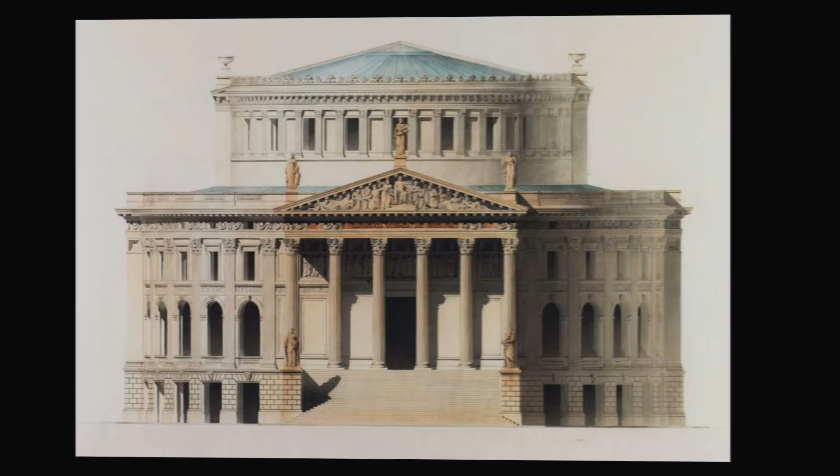Every practicing architect knows that solving facades is a very difficult task, no matter how much experience one has. Therefore, students are more than justified in their anxiety about the subject. What follows is a series of reflections on some choices that can and must be made when we have to decide what a facade will be like.

It would be impossible to mention all the themes and their alternatives. Therefore, I will limit myself to mentioning and commenting on some topics that seem relevant to me and that deserve to be explored in other moments.

It is also worth remembering that the facade is a three-dimensional element with thickness, and it should not be confused with its two-dimensional counterpart, the elevation.

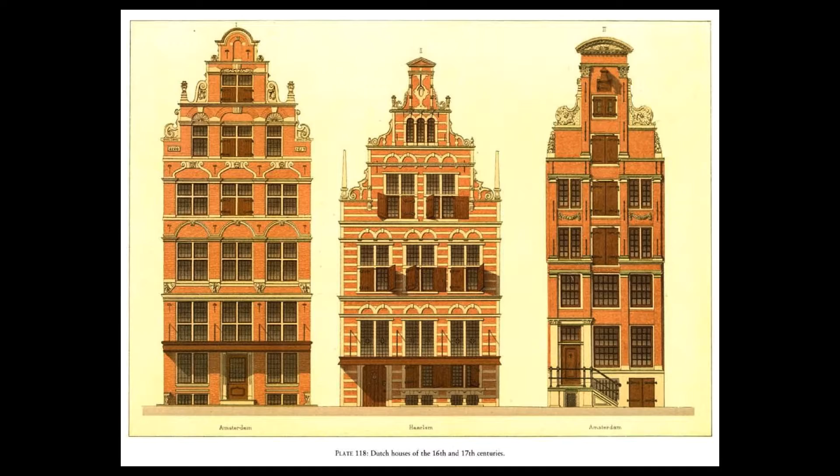Since the very first buildings were built, there must have been a concern with the appearance of the building's vertical boundaries. But it is from the Renaissance that the facade becomes an important element of any project. Remember that at that time, any important building was a typologically predetermined masonry box, covered with historical elements of Greco-Roman origin.

Which aimed to endow the building with unity and proportional relationships. This superficial layer was extremely important, as it was the means of establishing connections with the past and with what was considered to be the structure of the world. The microcosm reflected the macrocosm.

At the outset of the Renaissance, we see the beginning of a more careful treatment of the facade, by the hand of an architect who had worked with Alberti in Florence, Bernardo Rossellino.

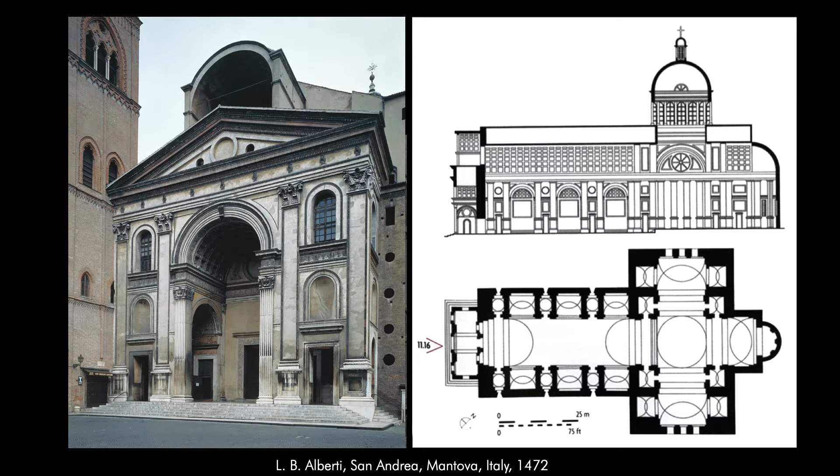In San Andrea, Alberti combines a temple front with the triumphal arch motif to solve the facade of a church organized as a longitudinal nave and side chapels.

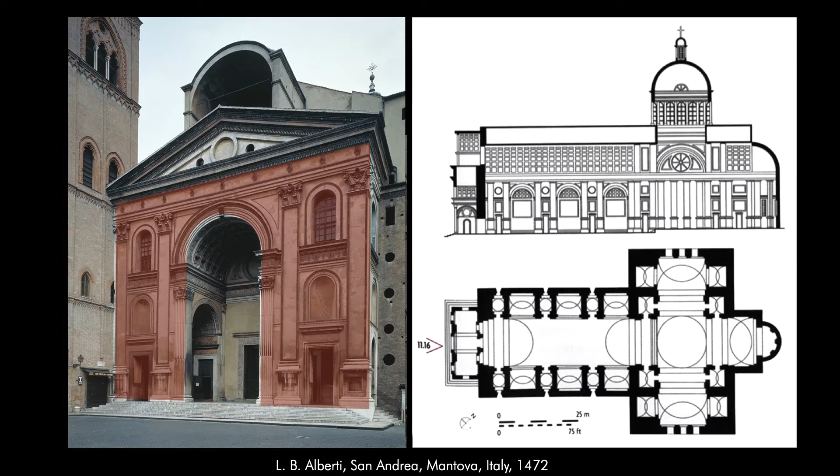In San Giorgio Maggiore, Venice, Palladio superimposes two temple fronts to create the facade of a plan that consists of three parallel naves. In order to accomplish that, he had to adapt the language inherited from Rome.

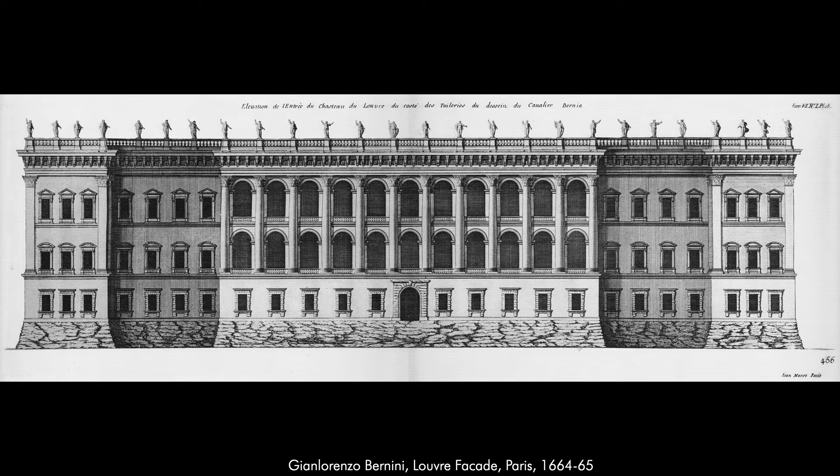So important was the appearance of buildings that, in the middle of the 17th century, a kind of contest was held to solve the facades of the Louvre in Paris, with Bernini being one of the invited Italian architects. Unfortunately, none of the projects were built.

In England, in the following centuries, the concern with the quality of the facades passed from the isolated building to the blocks that materialized the many urban projects that characterized Georgian London.

In some cases, the solution was to distribute the same elements over very extensive facades. But soon, architects started to introduce rhythms and centralities in facades the size of an entire block.

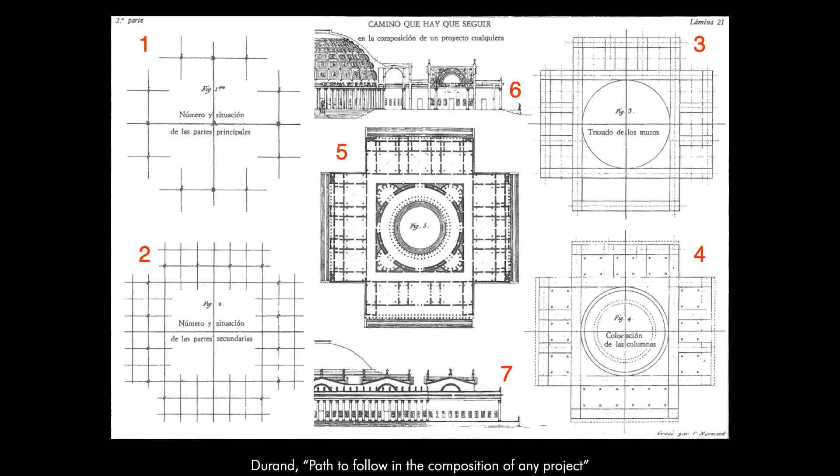Here we see this drawing in which he explains his method of design. And the numbers indicate the place given to the facade, which is number 7, that is the last step in a sequence.

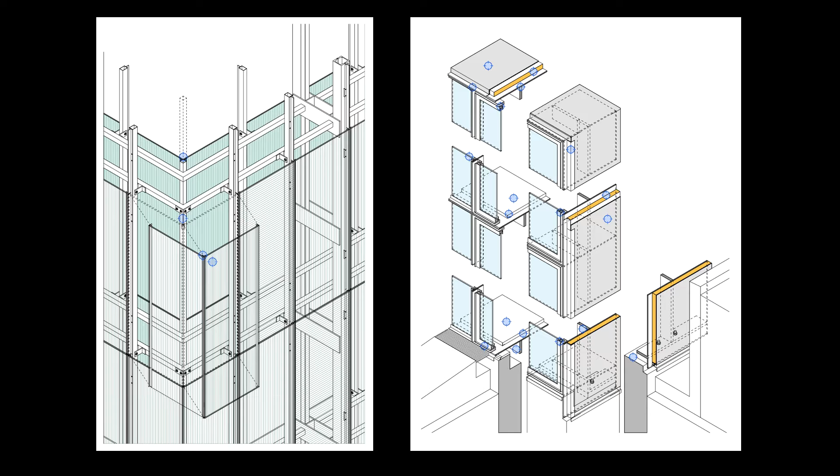At least conceptually, using a curtain wall seems to be an easy option, as it is a repetitive and homogeneous global solution. But whoever decides so soon realizes that this type of facade implies a series of other themes and problems that need to be solved.

There are situations in which, for reasons of privacy, orientation, or climate, one has to revert to the stage when there is much more wall than openings.

One could think that the opaque versus open theme is limited to the traditional facade, but it pertains also to Le Corbusier's free facade and the ribbon window. And if we add the thickness of the facade to the theme, the equation becomes a little more complex.

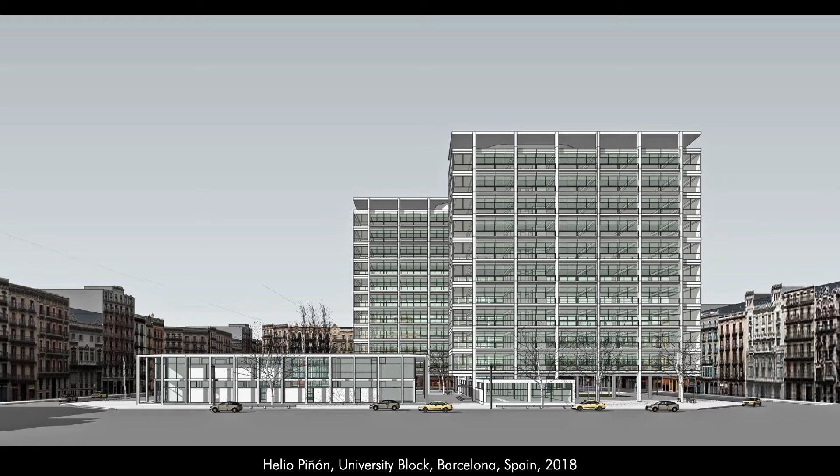The possibility of total glazing also depends on the use of the building. Offices lend themselves to this more easily than residential buildings.

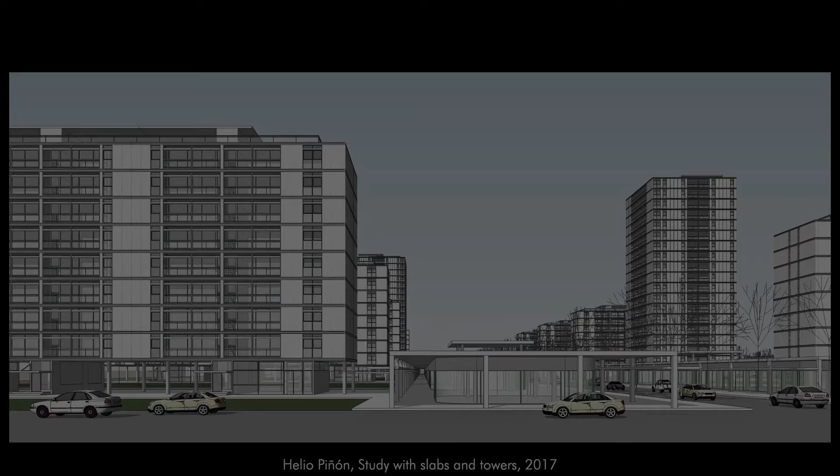The repetition of the same element over long stretches of facade can generate monotony, as we saw in the Park Crescent example, and as Arne Jacobsen himself tacitly recognized by not completely repeating the facade system used in Rodovre. At St. Catherine's College, he introduced a second rhythm that made a facade of more than 100 meters not monotonous, and he did so by making the party walls apparent, which also served to make very evident the 3.2-meter module that controls the whole project inside and outside.

The way in which the facade relates to the resistance structure is another very important theme that results in numerous design situations. The three clearest situations are total independence between the two systems and the subordination of one of them to the other.

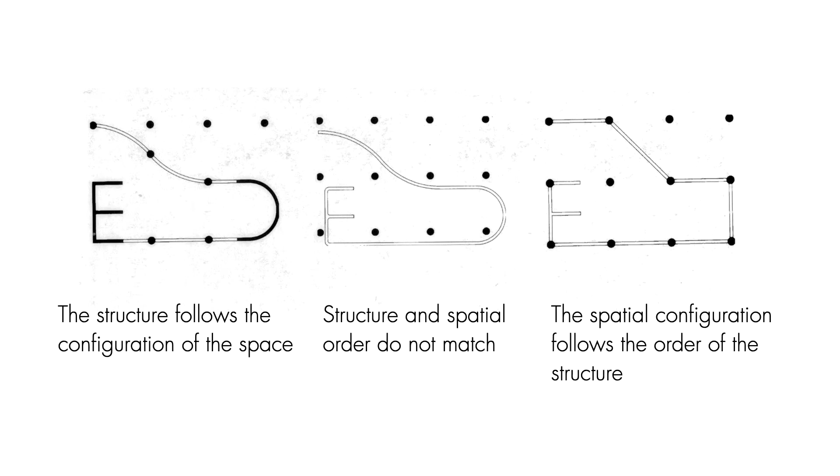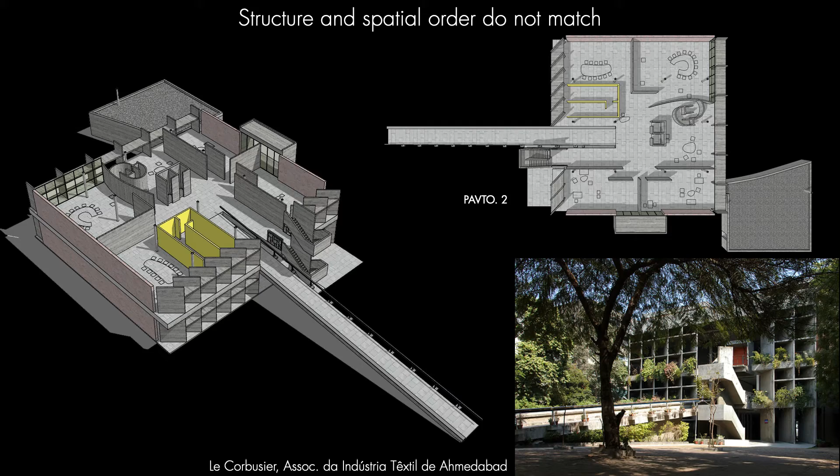In this example, by Wright, the structure follows the configuration of the space. In this one by Le Corbusier, structure and spatial order are independent from each other. And in the one by Kahn, the spatial configuration follows closely the order of the structure.

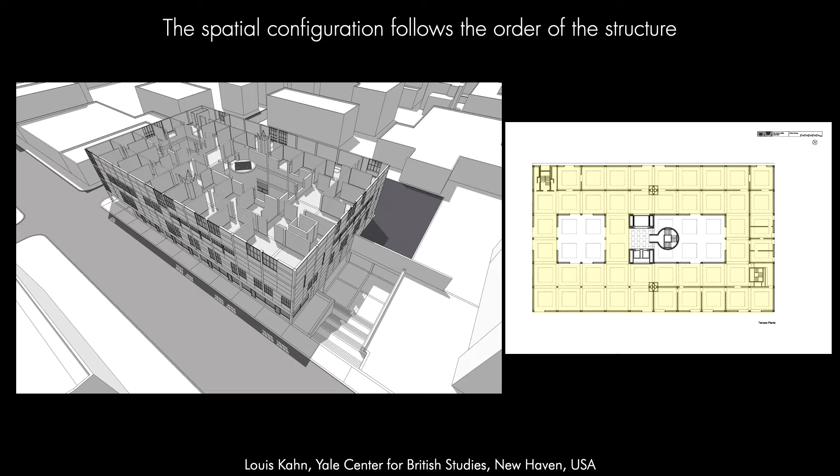In the 1920s and 30s, the structural grid became one of the expressive resources that filled the void left by the abandonment of historical styles. Essentially, the grid defines the building's exterior planes. Only then can it have visibility.

When the walls coincide with the grid or are very close, this relationship becomes the place of solutions that can be very complex, as seen in the Casa del Fascio, whose facades are so complex that it took an entire book by Peter Eisenman to decipher them.

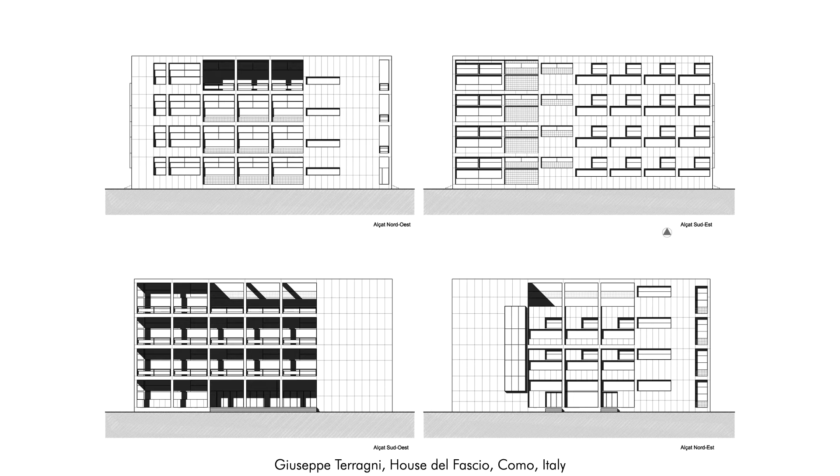Interestingly, there is a return to the theme of open versus closed when thinking about how to fill in the grid modules. There seems to be a need to anchor both the openings and the opaque panels to the elements of the grid, otherwise they will float within each rectangular area.

Not the case here. Kahn's example draws attention to the fact that resolving a facade has to do with creating a system that can absorb variations and internal needs without appearing to be disorganized.

Small setbacks give the facade three-dimensionality and facilitate the relationship between different materials. Larger setbacks generate intermediate spaces and serve as sun protection strategies.

In the hands of good architects, the manipulation of the grid can generate solutions of great visual interest. In this case, the reduction of the grain of the grid towards the top of the building, which in a way contradicts structural logic, introduces variety into the system. Furthermore, the fact that the gridded facade constitutes a large beam allows the cantilevers at both ends of the building.

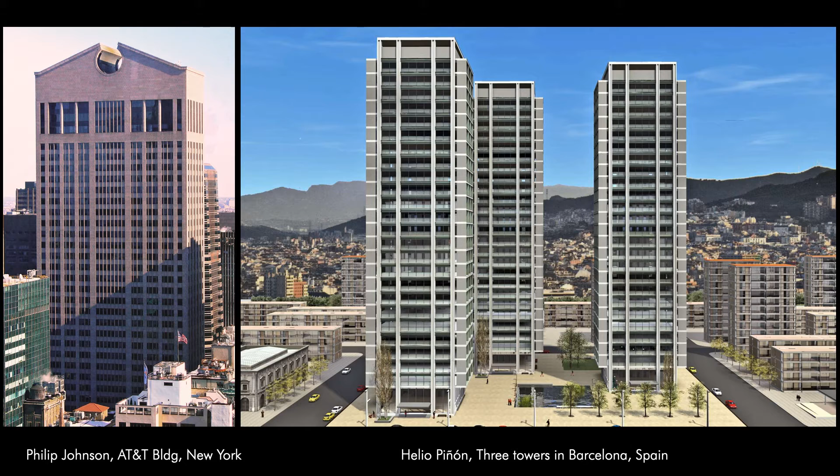Another interesting theme is the predominant direction of the facade: vertical, horizontal, or neutral. In Chicago, in the second half of the 19th century, all one wanted to do was to go up. Therefore, emphasis on the vertical, a criterion that, since it is not linked to any style, can reappear in the historicism of the 1980s or in some more qualified contemporary architecture.

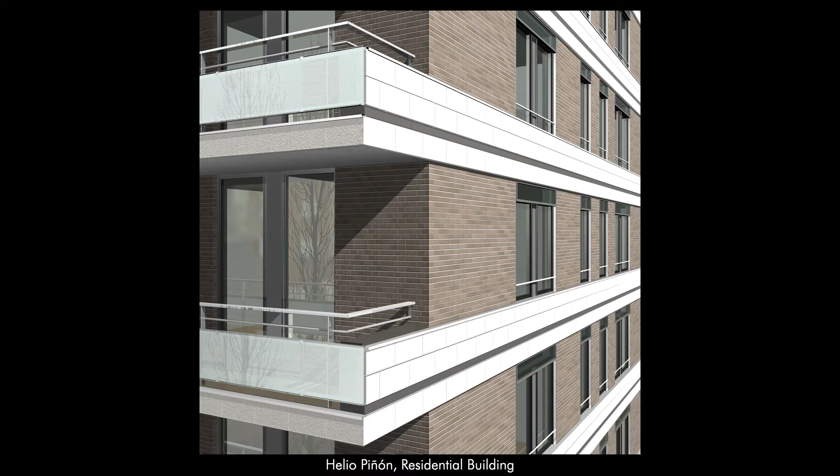The protection of facades against environmental aspects has been going on for centuries. In Galicia, a region of Spain characterized by humidity, it is common to build double facades, creating a shallow space that mitigates the problem. The outer layer is usually composed of checkered panels painted in white.

But the most common kind of protection is against excessive sun and glare. The standard solution for south and west facades is to use horizontal and vertical elements respectively.

External blinds are widely used, based on Spanish examples from the 1950s and more recent ones. Another way to protect a facade is to employ movable panels that can be positioned where and when needed, resulting in dynamic facades, as the total configuration of the panel set is never the same.

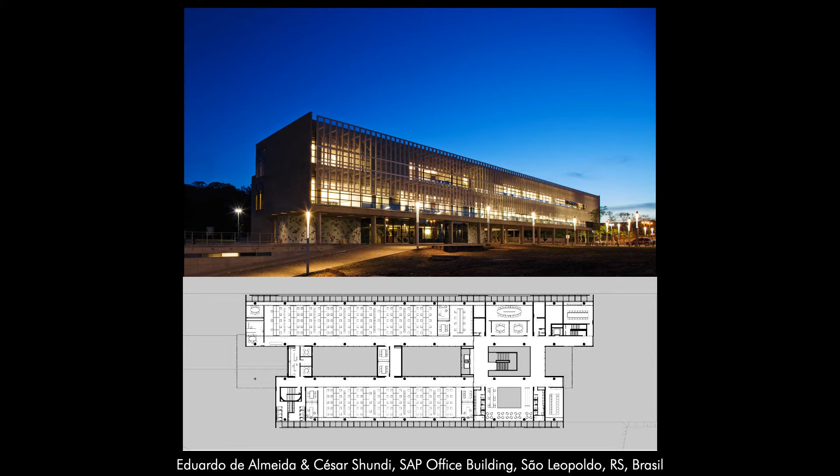More recently, metal sheets, perforated or expanded, started to be used as sun protection, as well as perforated concrete panels, almost always in static solutions. But traditional solutions are being reinvented and continue to be applied. Some are light and renewable, such as Spanish external blinds and awnings, and others involve permanent construction elements, such as hollow ceramic or concrete components, and the setting back of openings to take advantage of the thickness of the facade.

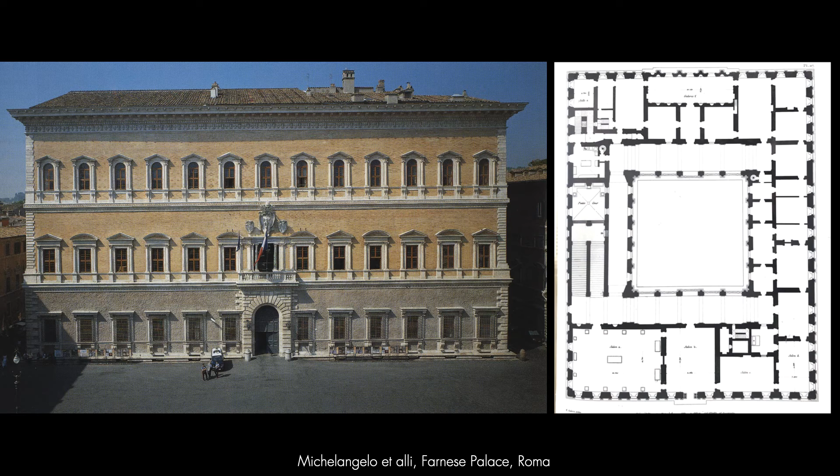Until a century or so ago, it was not thought that the facade should reveal what was happening behind it. See the case of Palazzo Farnese in Rome, in which a homogeneous and repetitive facade does not reveal the variety of interior spaces that it limits.

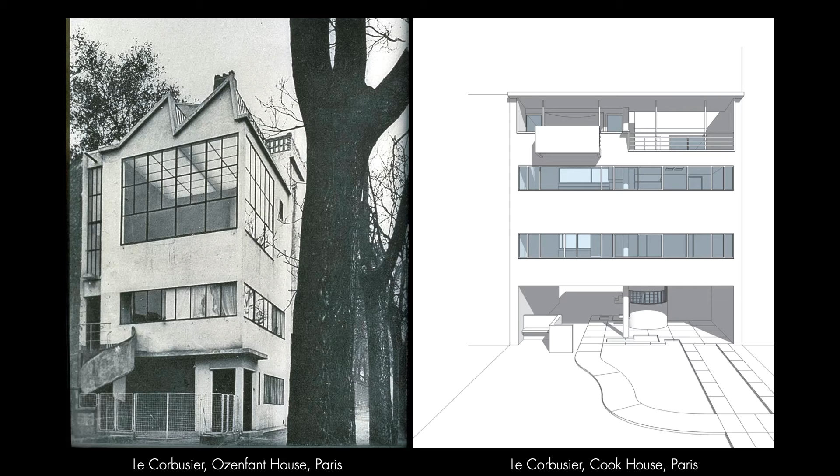In modern architecture, there are cases of all kinds: clear revelation, as in the Ozenfant house, in which the painter's study is revealed by the large windows and skylights; and total opacity, like in the Cook house on the right, where one has no idea what goes on behind the facades.

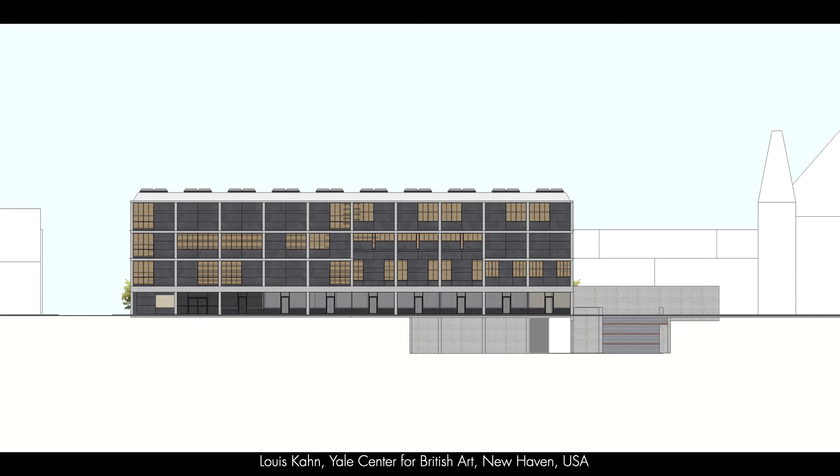Or subtle articulation of the interior, as in Yale, in which Kahn interrupts the second floor beam to indicate the position of a double height space, the library of the institution.

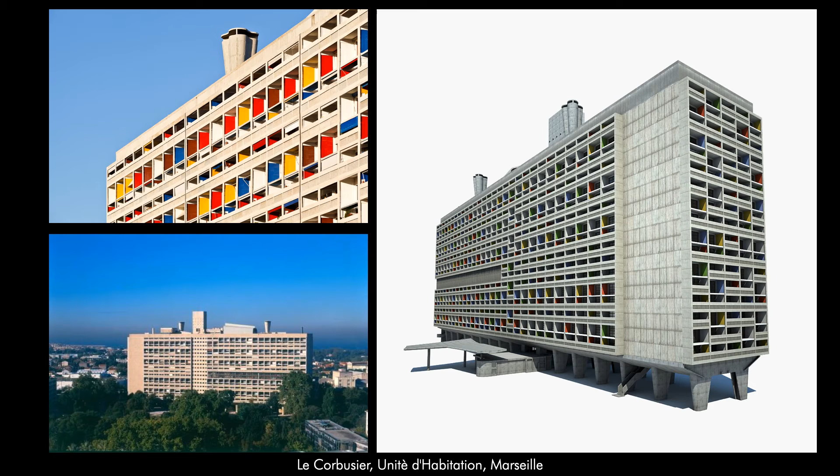In Marseille, Le Corbusier tries to minimize the impact of a very repetitive facade by painting the interior of some balconies in primary colors, perhaps thinking of facilitating the orientation of residents.

In a more picturesque architecture, the fragmented volume exempts one from having to think of the facade as a single piece, but imposes the establishment of some kind of relationship between its parts.

A constant concern for students and many architects is to provide their buildings with movement, as if this were possible. For this, they adopt irregular configurations of their openings, which try to appear random and which are in fact arbitrary in the bad sense of the term.

If the enemy is a supposed monotony of the facades, it is possible to avoid this with solutions in which mobile elements, activated by the users when necessary, configure different facades at all times. If the purpose is to provide the facade with some variety, the simple alternation of the position of the opaque and open parts can create a very pleasant result.

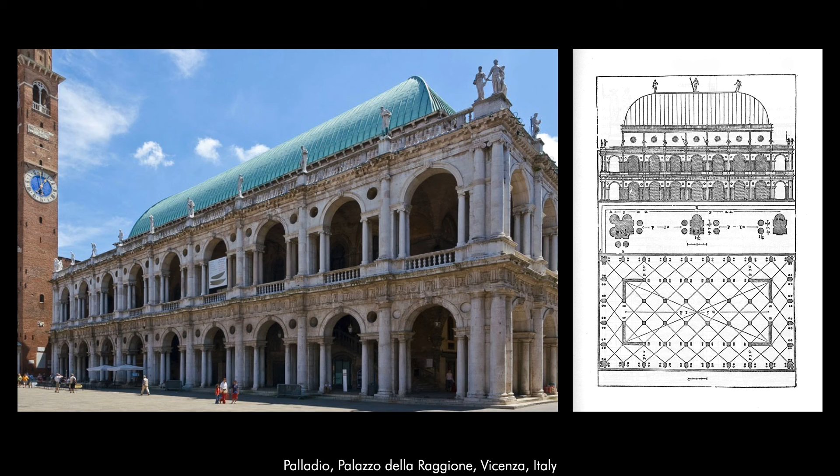The same multiplicity of solutions just suggested are also true for the external facades, be they traditional or modern, as can be seen by going through a sample of the solutions created by Mies van der Rohe for the corners of his buildings.

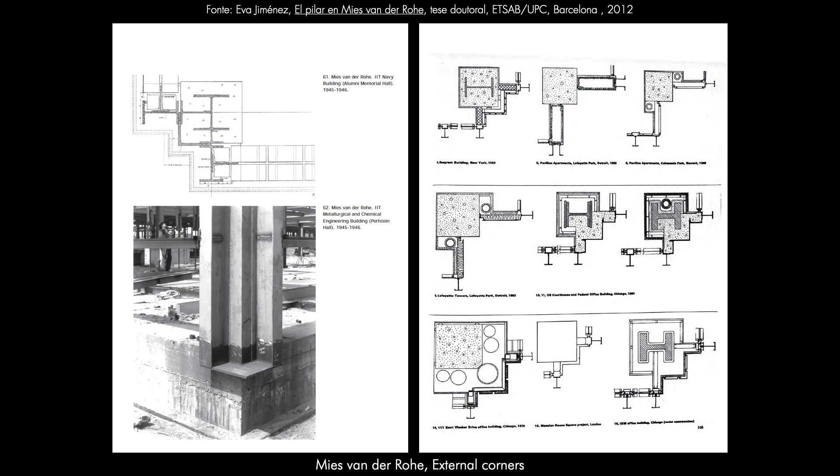In another context, I stated that in some cases, such as the architecture produced by the so-called Paulista school, the definition of the resistant structure and the spatial configuration happened at the same time. Once the structure was defined, the project was practically ready.

This is the case with works that use prefabricated structures. In these situations, there is no specific step in which the facades are designed, or more precisely, everything is designed at the same time, and there are no decisions that do not affect all subsystems. Therefore, the facade seems to appear as if by magic at the end of the process.